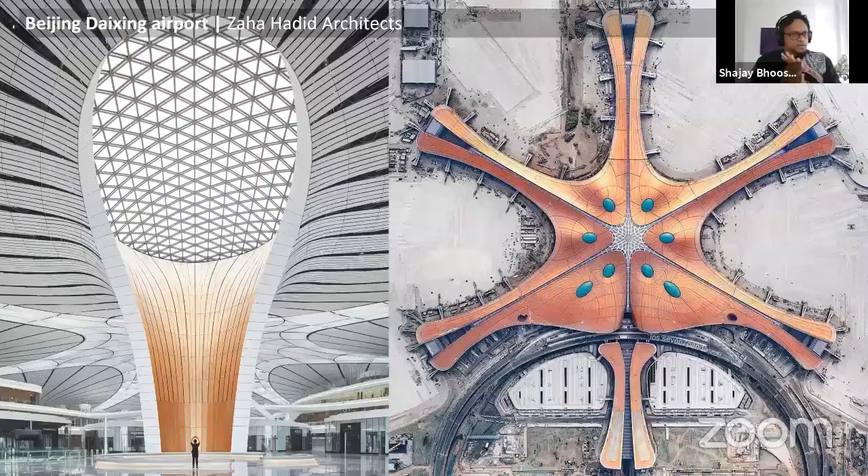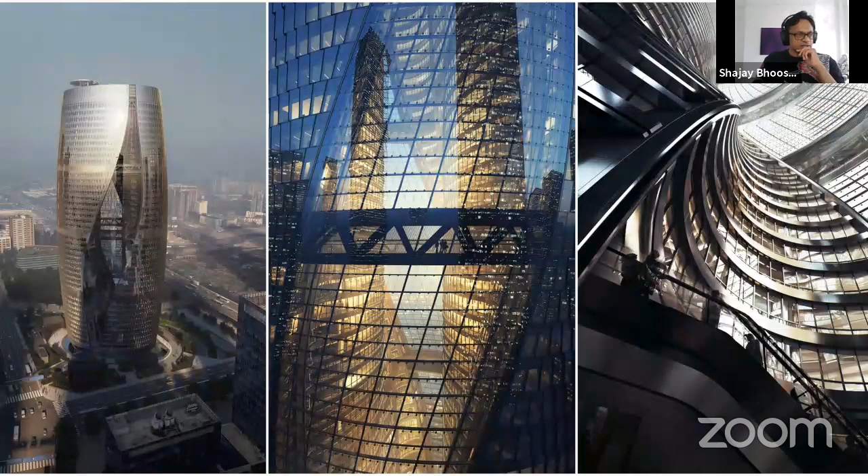My team and I feel quite fortunate to work in a global company with talent from all over the world, from about 60 different countries, spread between Asia and Latin America. We feel fortunate also that our colleagues, peers, and preceding generations are manifesting these amazing buildings, including two that got completed last year, the Beijing airport and the Leeza Soho tower with the largest atrium.

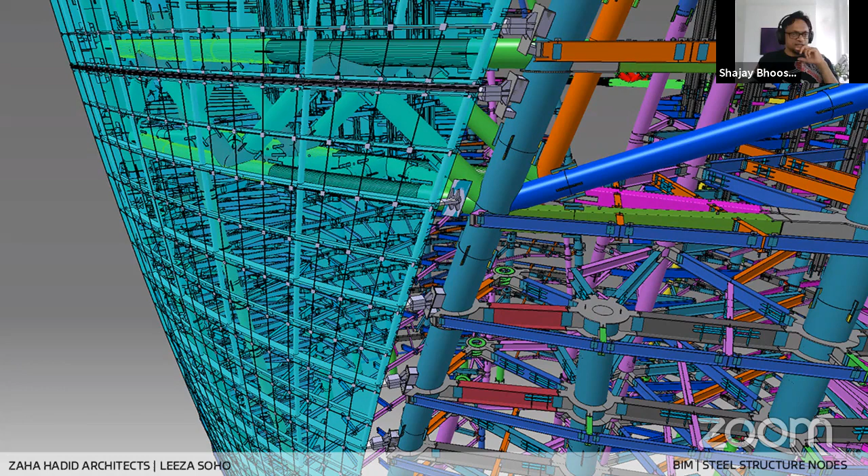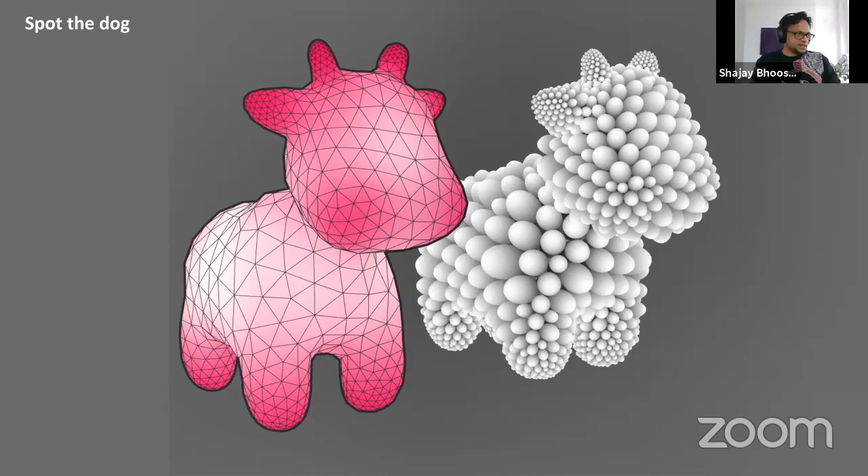We're fortunate to witness not only the physical manifestation of this but also the genesis, and also all the sweat and detailing that goes into these buildings. Lastly, that allows us as a team to focus a little bit further ahead, on the near imminent future, and how we can shape that with new technologies. So we get to play in a serious way because our peers and colleagues are really at the bleeding edge of architecture, a very enthusiastic and motivated group of people.

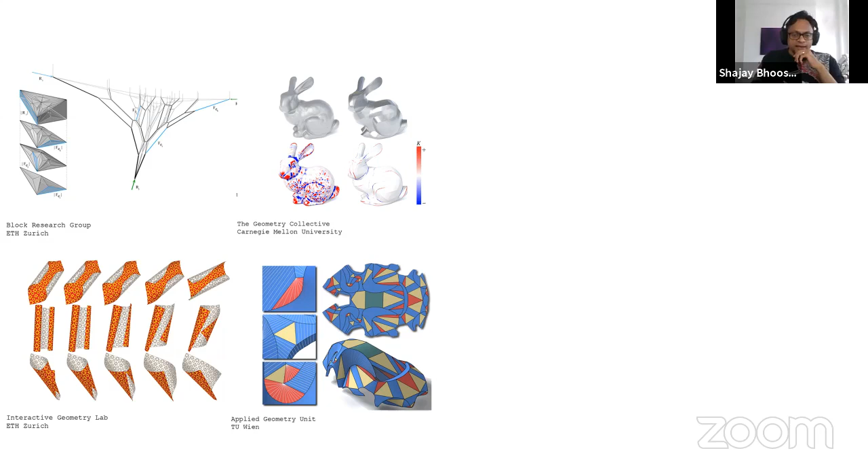As a team we tend to research these geometric, so-called computer-aided geometric design technologies, CAGD technologies, and their relationship to more mainstream BIM practices. We've been doing this for the last 15 years or so, and now a lot of this is becoming available in a more mainstream way. We feel very enthused by recent developments, both by the Block Research Group on one hand, to bring bleeding edge research to a much wider audience, and also practice-based BIM experience from Buro Happold Engineering, making it available through these computational frameworks. So, a very exciting time to be in practice in London.

So that's why I felt we are in a position to talk about the real promise of digital design and robotic construction as it is maturing very rapidly, which is citizen-centric cities or citizen-centric built environment, in some ways for human betterment and through effective resource utilization.

Which I believe is the real promise of digital design and robotic and advanced manufacturing. So the talk will briefly situate architectural design and urbanism of such cities, the social and physical technological layers that might need to interact, and also a first real world attempt that we recently tried to launch, and hopefully will bring to fruition over the next year.

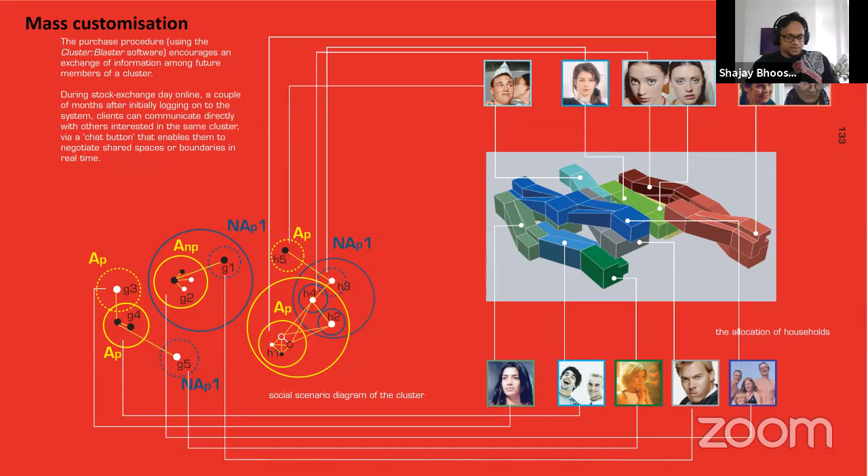This was pre-Facebook ideation and speculation, that you can use web technologies to create online communities and subsequently use digital construction to produce mass customized housing. So since 2015, my partner and myself have tried to pick up this thread in view of the rapidly maturing digital design and also social technologies and constructional technologies of robotic manufacturing and DFMA, design for manufacturing and assembly, and so on.

So over the last 5 years, we have tried to anticipate - through graduate researchers and our own effort and collaborative efforts - we have tried to research this idea across many core topics. For example, the first main topic has been about how to spatially organize communities.

Can the communal synergies be physically manifested, particularly in kind of live-work communities, which were quite common in London before the war - like the ideas of a top shop, or live-work ironmongery, or a bakery and so on. So can we have something like that was one of the topics of exploration.

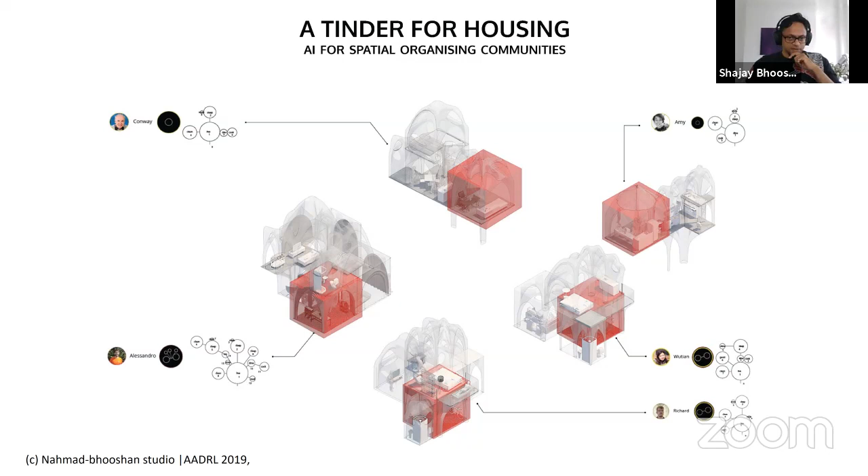And that was for long-term communities, and then we also explored similar things but for short-term communities, like a lot of students and young professionals that come in and leave London at an average tenure of 2 to 3 years maximum. So how can we address that?

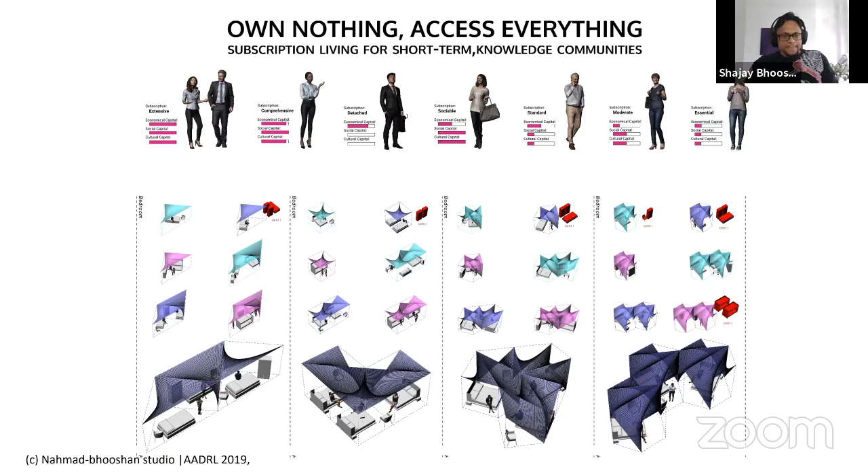Another topic that began to emerge is the idea of gamification of these - how we can leverage game technologies, but also game theoretic mechanisms, to arrive at negotiated solutions between sharing and resource pooling and so on.

And across all of these efforts, the main idea is to challenge the 100-year stranglehold of this architectural diagram of the Maison Domino, and its pairing with a technological equivalent of the Hennebique patents and reinforced concrete construction, and so on.

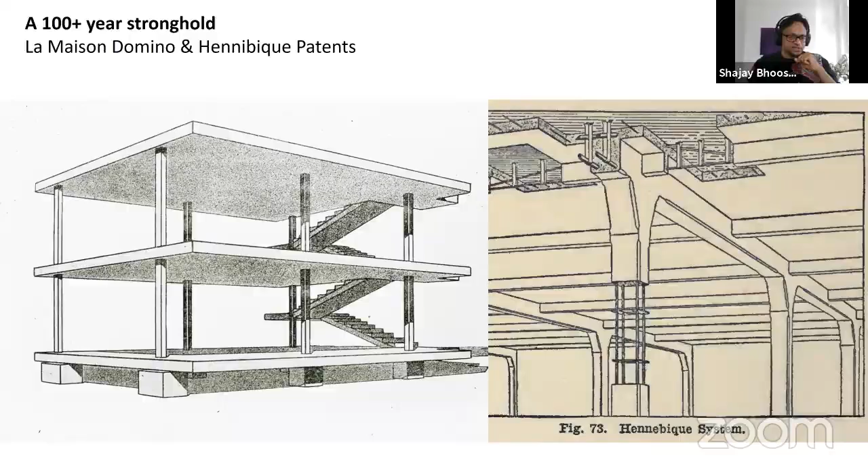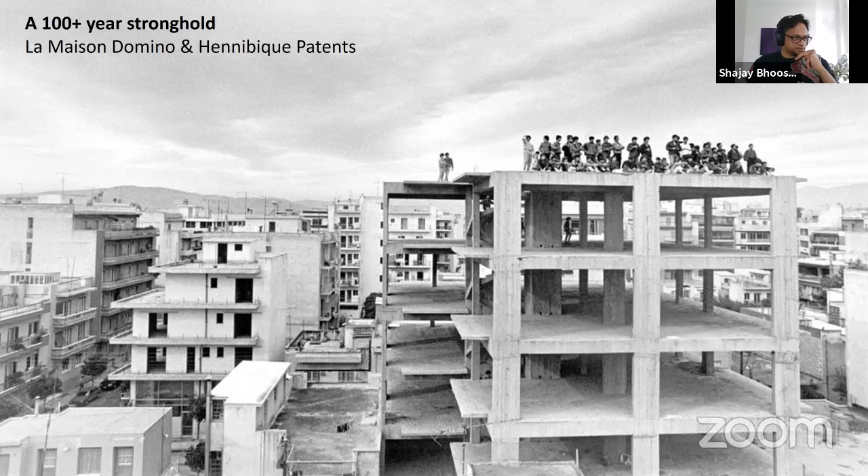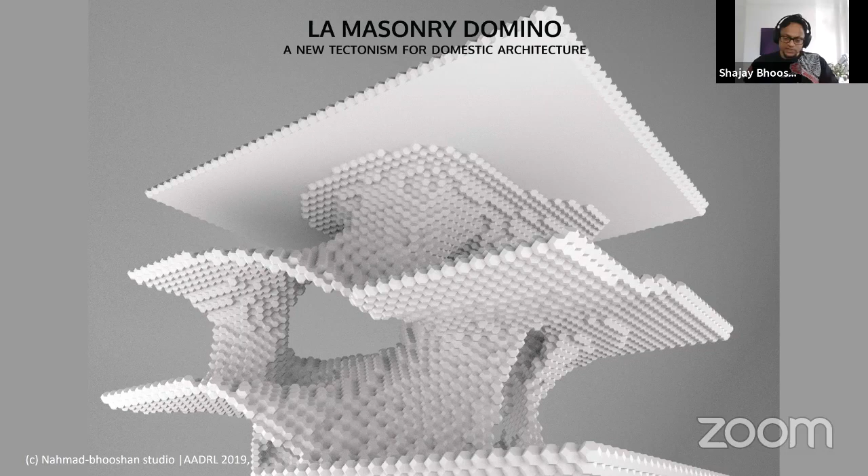So how we can revisit this in the 21st century, because it was enormously successful, but also it left quite something to be desired in the effect it had. So, to take on the positives whilst avoiding the negatives, let's say - we try to revisit across all of these efforts the idea of a Maison Domino, and how we can construct a new tectonism for residential or domestic architecture in view of emerging technologies.

Since last year, with the relative success we've had over the last 5 years, which I'll speak about more towards the end regarding the real-world instantiation of some of these ideas, we now feel it's time to start thinking about participatory cities. And that's what we are doing now.

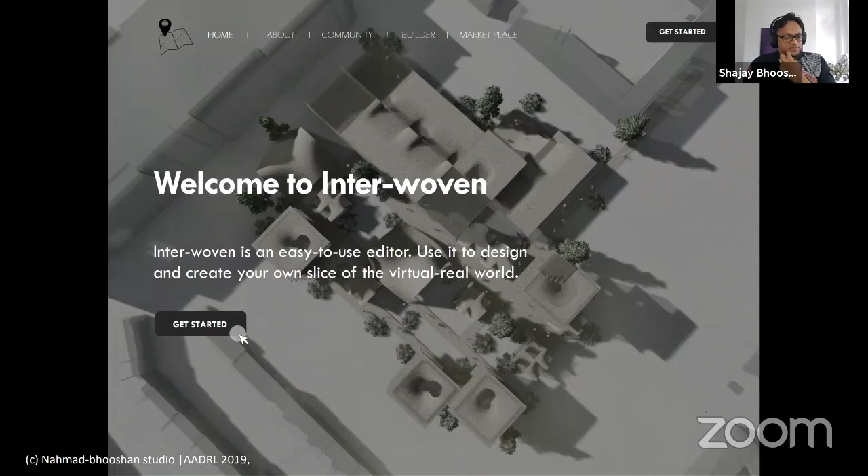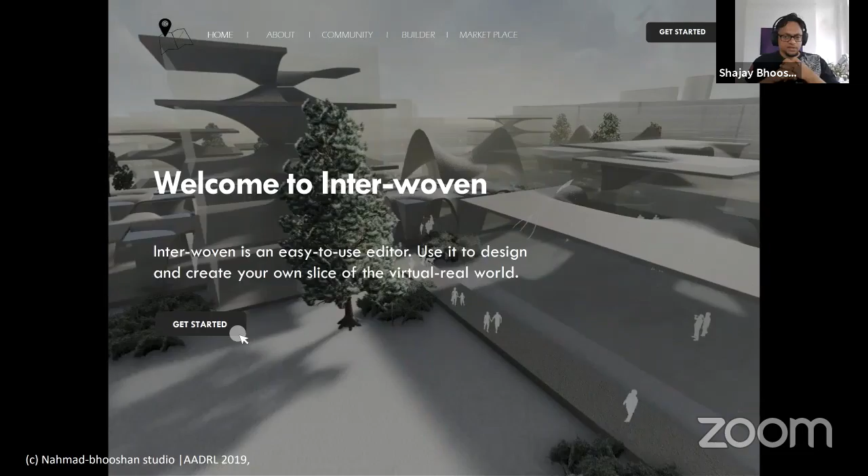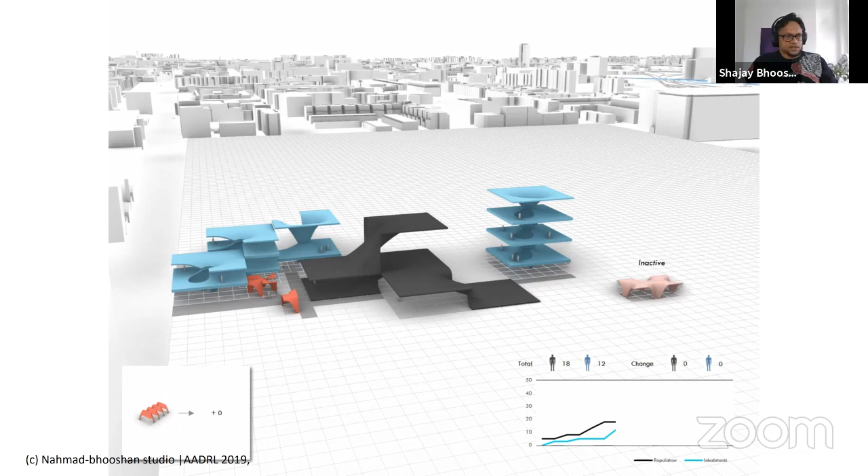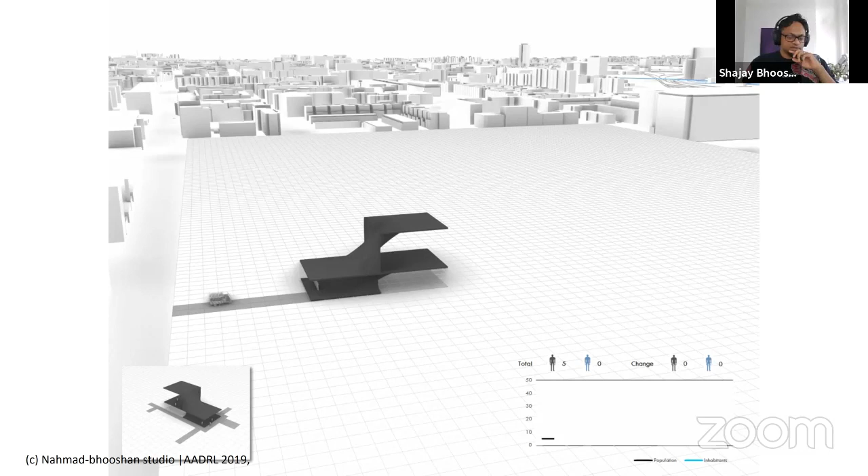Just to give you a glimpse of fresh work from the DRL from this year: the idea is to create platforms, leveraging digital web technologies and real-time interaction technologies, pairing virtual and real worlds through an architectural technology layer. The idea is to have a space of experimentation, speculation, and forecasting—predicting what might happen through gameplay mechanisms or role-playing, so we can keep track of motivations. It's a speculative idea to figure out what might happen if you revisited urban development from first principles.

So in that sense, we see participatory cities as composed of two main layers: the base physical substrate of industrialized construction, and the social-technological layer of governance technologies. So what do we mean by governance technologies?

When it comes to governance of the built environment, we all know it usually relates to taxes and policies of real estate, zoning laws, infrastructure development plans, transport requirements, parking laws, and all these various laws—and governance of those usually multiplies and proliferates quite rapidly.

The question is: can we introduce a technological layer for governance from first principles? Which means—what are the first principles of governance behind all these policies? We have to effectively allocate resources, and we have to take speedy decisions such that we deliver services to inhabitants.

So what are the challenges of such technologies? First, it has to be a low-risk environment, because we cannot make expensive mistakes in the built environment. There also needs to be fluid interchange between expert oversight—planners, architects, constructors—and at the same time, there are many stakeholders, like citizens, who are affected by these decisions. So how can these two interact? How can we provide agency to the non-experts who are affected by expert decisions? Those are some of the challenges.

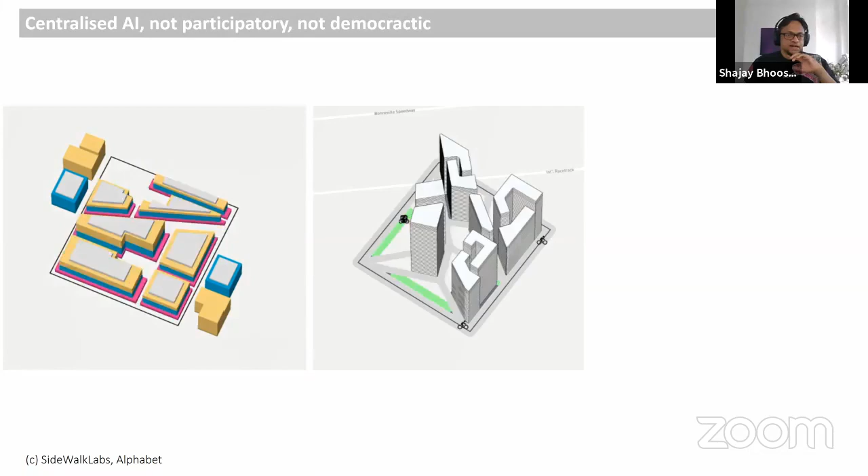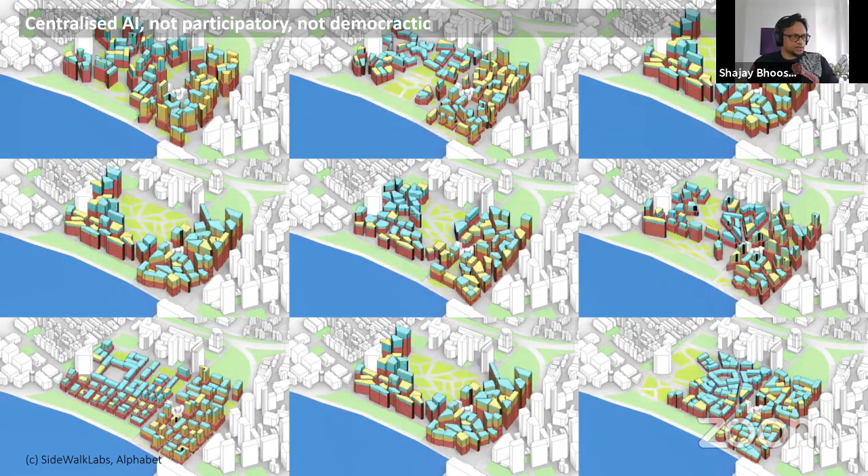So even though Sidewalk Labs and Google are talking about the right things—trade-offs and participation—their design systems are entirely centralized. They're not participatory, they're not democratic. It's a centralized expert system that goes through millions of options and then executes in one go. So it's not as transparent as it could be.

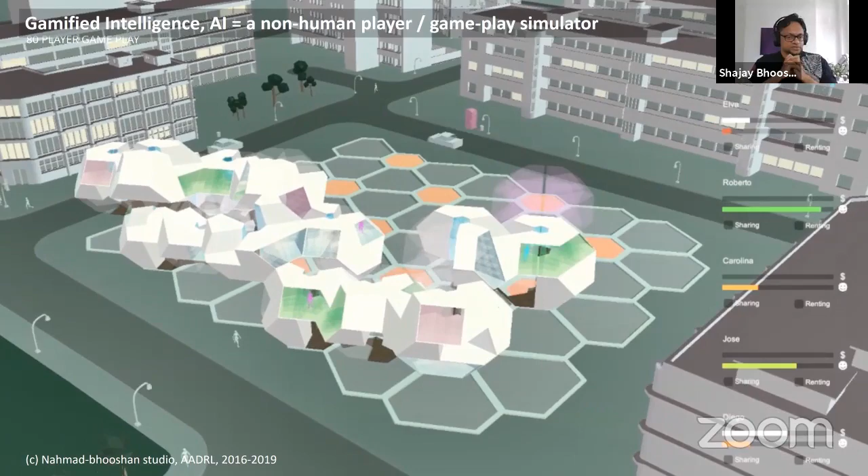Contrast that with where we're coming from: we definitely can leverage and use AI systems, but they are just a non-human player within a game, or they can be used to simulate human gameplay and forecast scenarios of the social and interaction layers.

Here we're simulating 80 players trying to rent and share spaces as they go, sharing resources and transacting with each other in a kind of small economy. We keep track in this simulated gameplay of how many transactions happen between inhabitants—the black represents transactions with the community as a whole. You can see that changes over various time instances: sometimes the community has to invest more, sometimes less. It's a kind of equivalent of a voluntary tax.

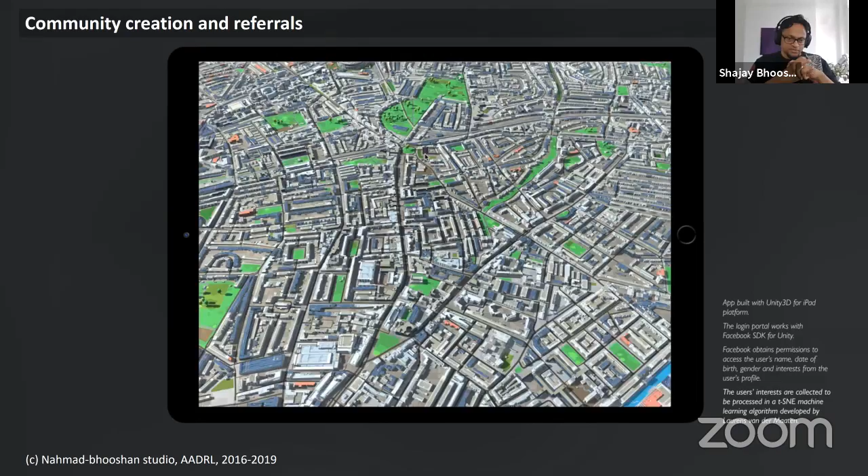That's one side where we think game technologies are very useful to explore. The other is the social layer already built into a lot of these game technologies—you can hook it up to a Facebook community and use Facebook for real, doing good stuff rather than just whiling away your time. Facebook also has a lot of these AR technologies built in.

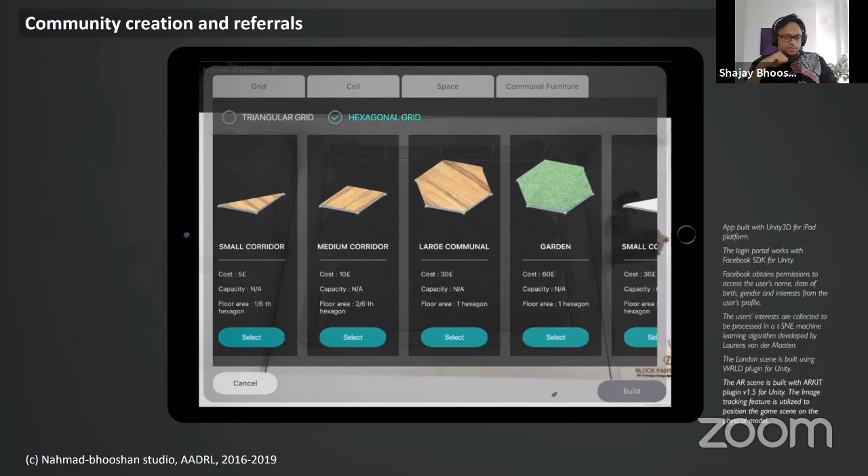And so we could leverage this. This is a kind of simple AR app that we built, where people can choose various things that they want: playground, little bedrooms, and so on. So it's a kind of simultaneous gameplay between multiple people.

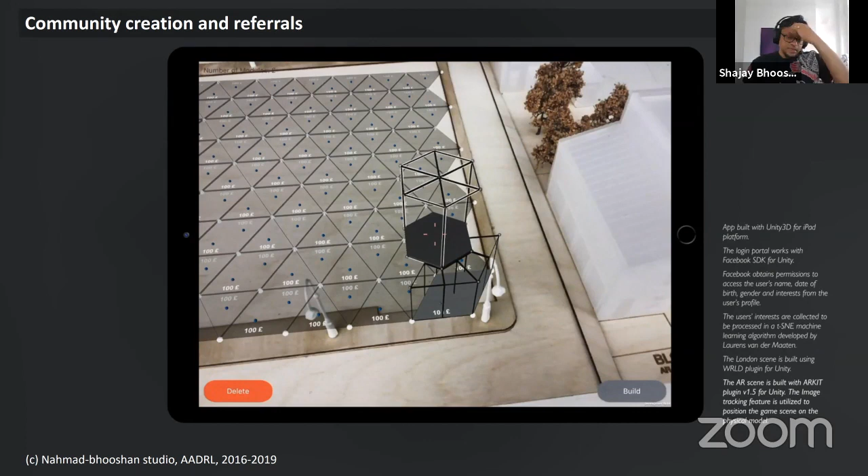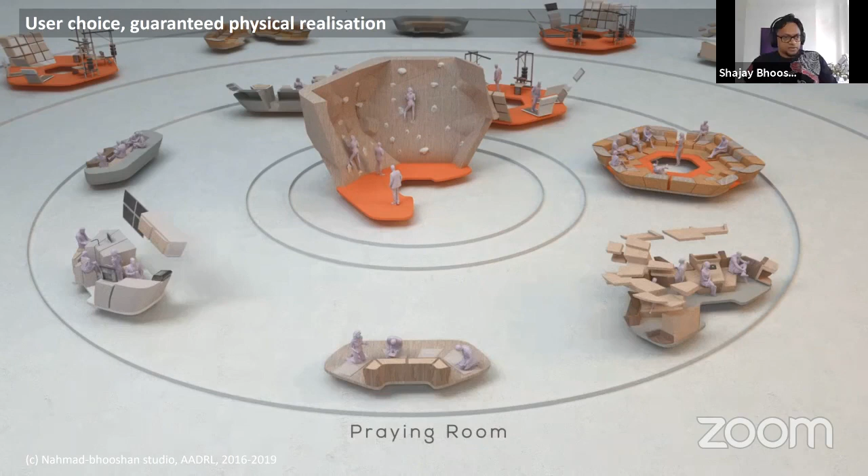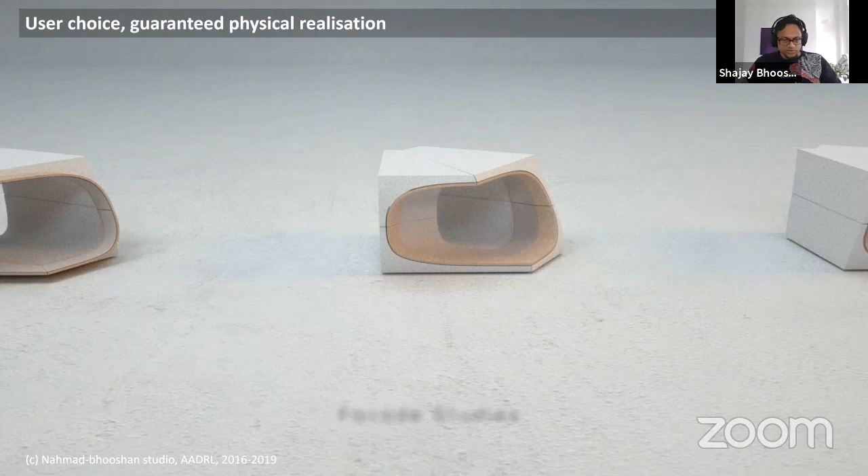And we can also go entirely blue sky with this, where we can at least speculate how to design for all of this choice, so that it's not just like a car where the choice is related only to the color or type of your seat, but we can have spatial choices ranging from what kind of things people want, from rock climbing to gyms, but at all times all of these things are physically guaranteed to be viable.

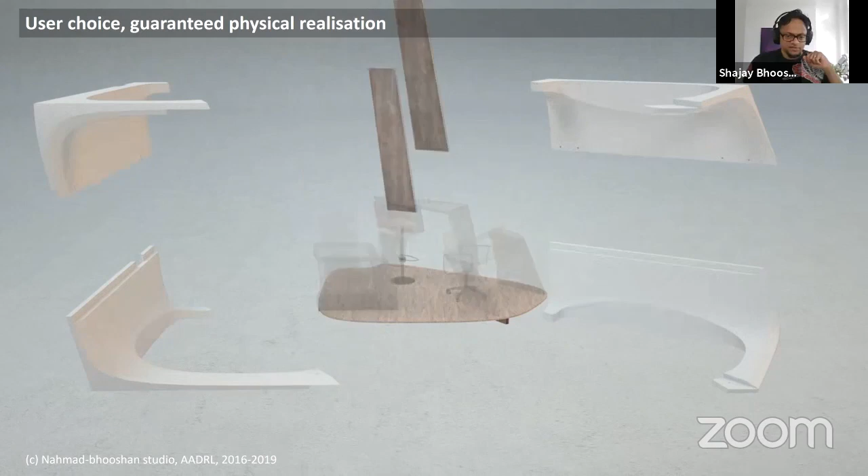So it's a very highly curated design space with enough variety to offer to various inhabitants. That's what we mean by governance technologies: looking at self-formation, self-guided, community-forming, cooperative types of residential developments, and how that can be further extended to cities.

By industrialized construction, what we mean first and foremost is that the kind of technology you use to build cities and buildings definitely has an effect on the type of city you will get. So they compare Atlanta in the U.S. to Barcelona in Spain, and you can also see that it has an effect on the ecological footprint.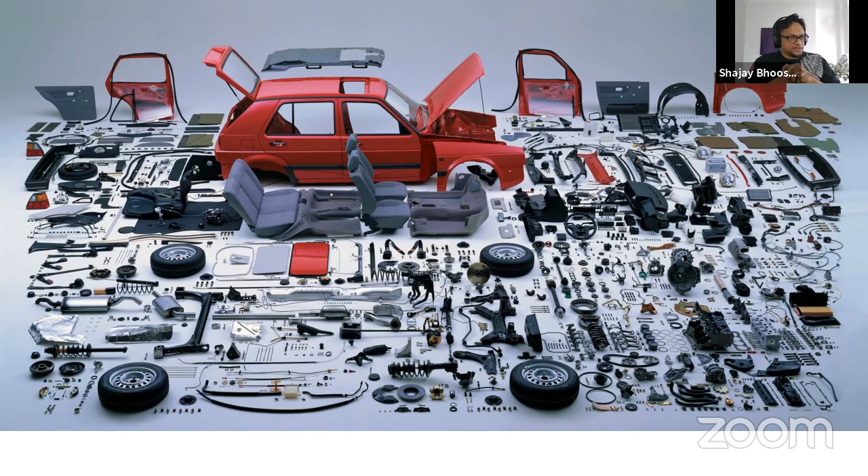Same population, order of magnitude more environmental impact. So whilst there is a ready understanding of the benefits of thinking about buildings and cities like cars, and efficient manufacturing, a kit of parts, and so on...

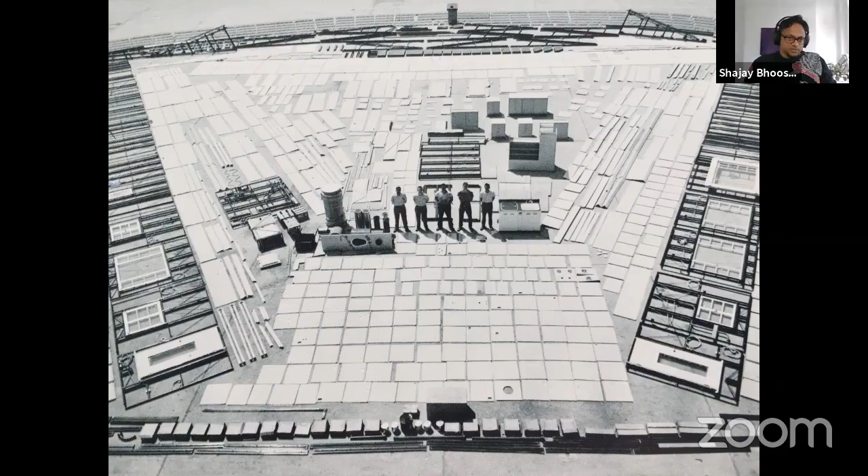When this has been tried in architecture before, this is the Lustron house. It leaves something to be desired in terms of its mass reproducibility. So we don't want all houses to be exactly alike—there is a social layer missing in all of this, which is what we are trying to address.

So whilst we want to take on the idea, the effect, economies of scale of manufacture and assemble type of industrialized construction, we also want to reconnect and upgrade traditional wisdoms. Why? Because there's a lot of intelligence embedded in the way things have evolved in the built environment.

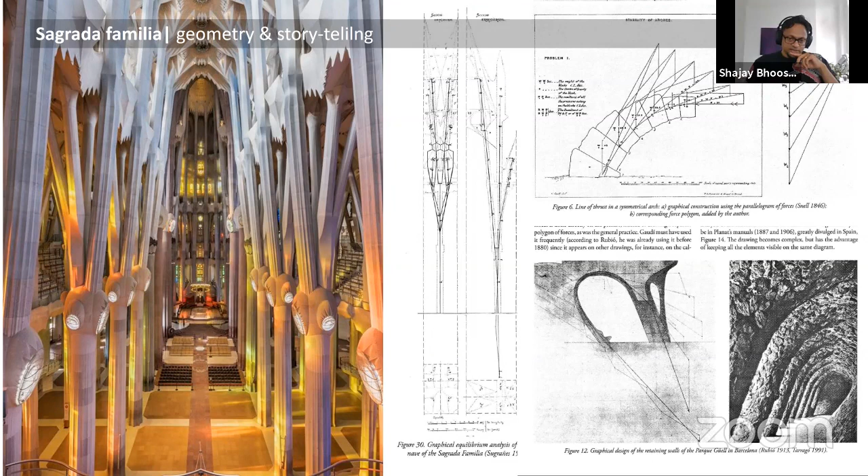So for example, we want to reconnect with some of the technologies and thinking, particularly geometry-based thinking of people from the 18th and 19th century, or even before that from the Gothic and Renaissance times—these kinds of graphical, geometric means of designing structure.

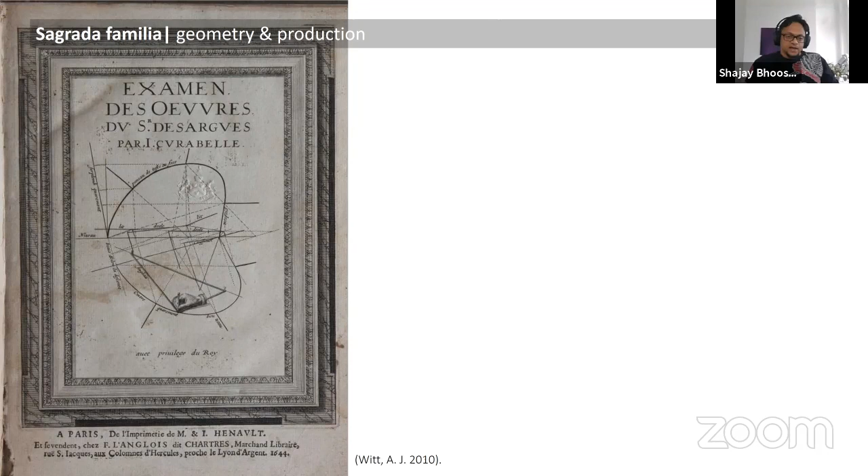And not only that, all these geometry-based manuals of construction meant you didn't need to be a mathematician or a geometer to be able to construct these. So geometry was the base language through which construction was encoded, and geometry was encoded in these machines, in these instruments. It was encoded in the way to draw these construction drawings and even construction instructions.

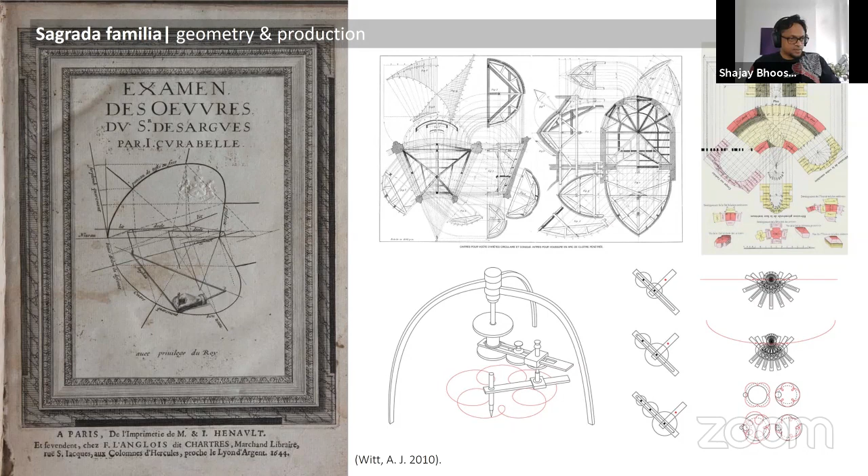And so we want to reconnect with that kind of thinking. This is also, in a way, industrialized construction, where there's an ecosystem of knowledge workers. I mean, this is pre-computer time, but we see these as very, very relevant predecessors to the kind of effort we want to do.

And so this is where we see a significant role for architectural geometry. By architectural geometry, we mean structure and construction aware shapes. I will try and give you a few examples of that.

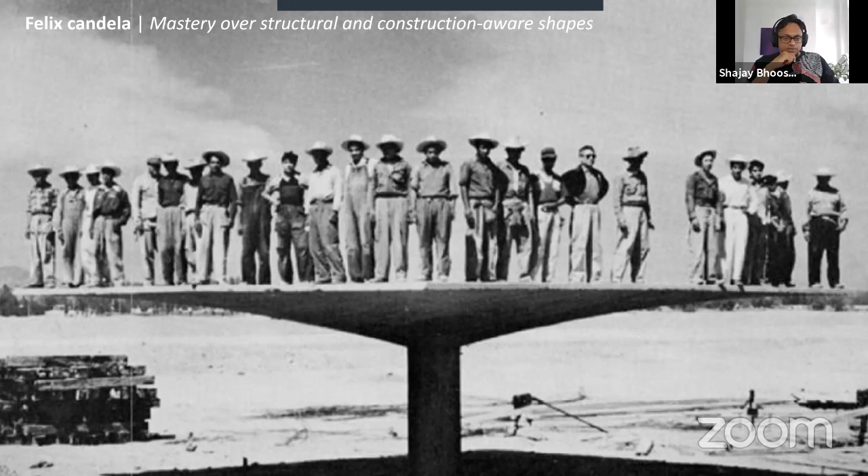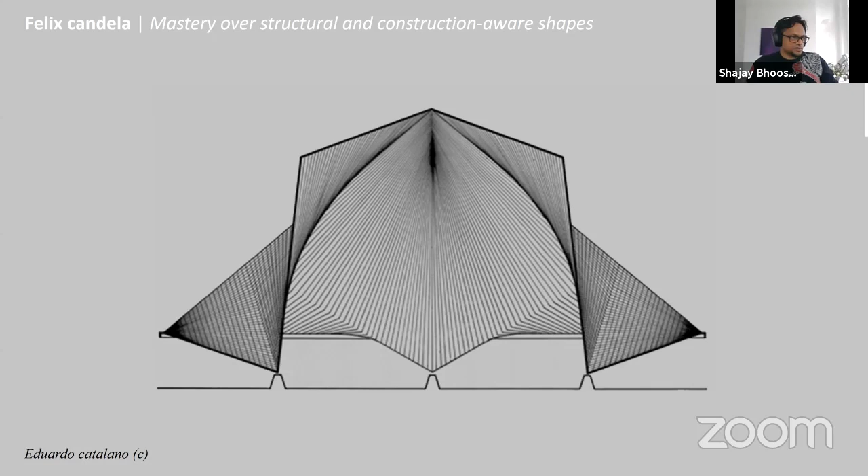And this is in the context of Felix Candela, who was really one of the early masters of such geometry—structure and construction aware shapes. You can see how thin some of these structures are for the weight they can carry, and highly performative shapes. It also had the additional benefit that they could be constructed using simple straight lines, so you could create doubly curved geometries with simple ruled or straight-line formwork.

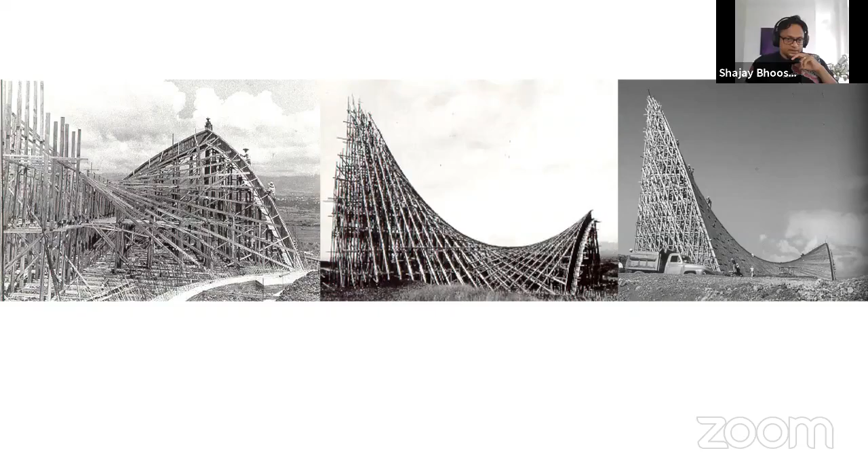This is one of the early examples of what we mean by structure and construction aware shapes. But of course, this came at a price, because you were making the formwork twice—basically making the shape twice, since you had to get rid of the formwork after it was made.

So in that context, we did this one where it is fabric formed with lost fabric formwork. The colorful fabric you see is the formwork for laying the concrete on the outside, and it also penetrates inside. The entire formwork was made on a grandma's sewing machine in Zurich, packed up and taken on a commercial airplane in a suitcase. The entire formwork weighs about 55 kilos. It was designed and engineered by the Block Research Group as part of Mariana's PhD research.

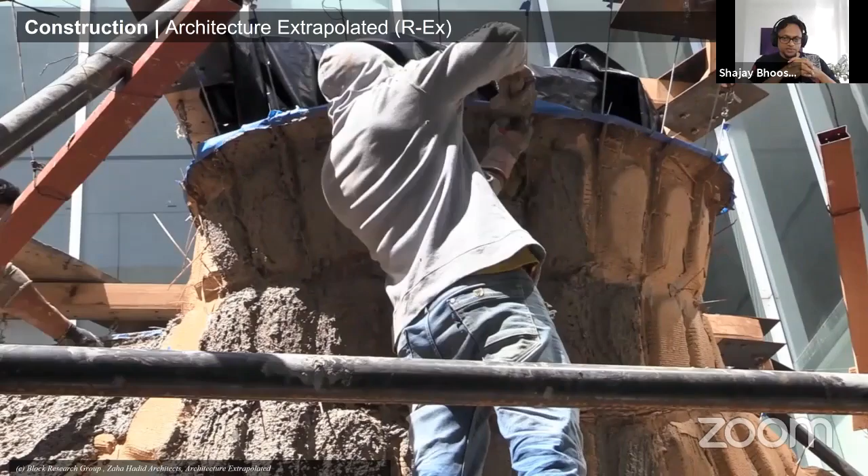And then we just made minimum guide work on the side, and pulled up the fabric and tensioned it. Subsequently, architecture extrapolated and coordinated all the construction workers, and the extremely skilled Mexican labor in terms of casting concrete against gravity, against highly curved shapes.

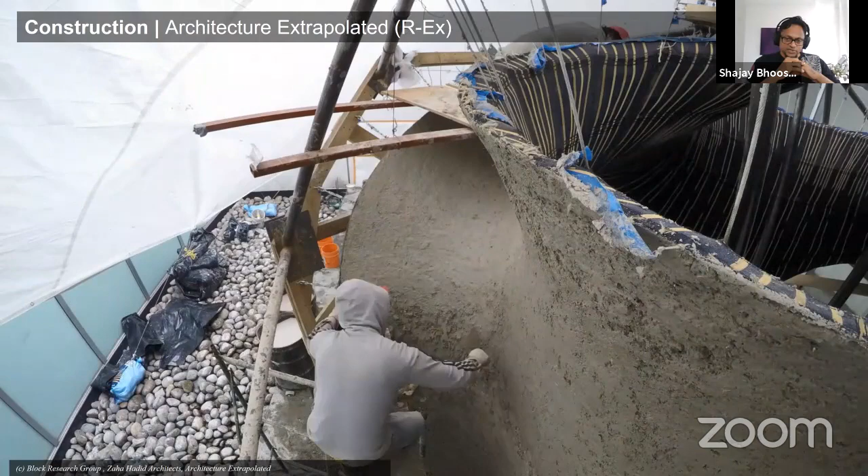Shajay, may I interrupt you just a second? When you talk, the video sound is too loud, we cannot hear you. Okay, yeah. You mean like the sound of the music? Mm-hmm. Okay, I don't have any more music in it. Yeah, so it's a similar situation.

We've tried to expand on these ideas, that everything you see here relates to how it performs structurally and how to construct it. For example, all these lines on the fabric are related to lines of equal tension, so there is no wrinkling. These are not arbitrarily drawn lines; they're drawn specifically to minimize wrinkling when you stretch the fabric. These kinds of shapes allowed us to create many little shapes within a small gallery of 1,000 square meters. There were 25 different stories told in that small gallery because of the added freedom that curvature and complex shapes allowed us to utilize.

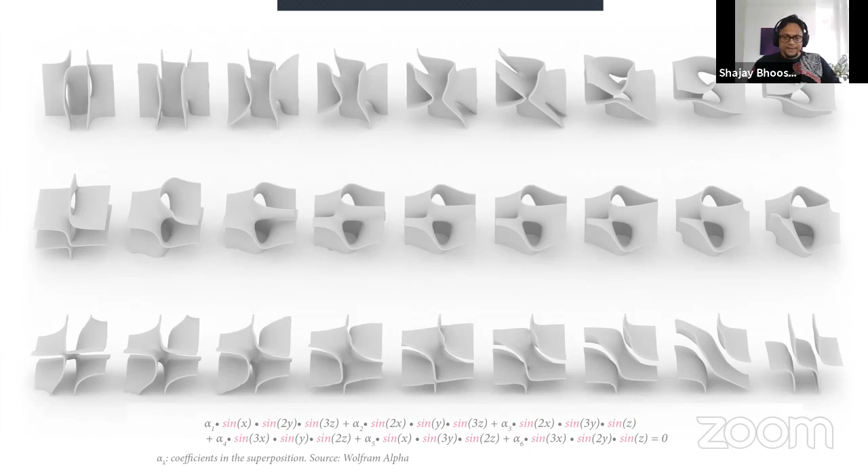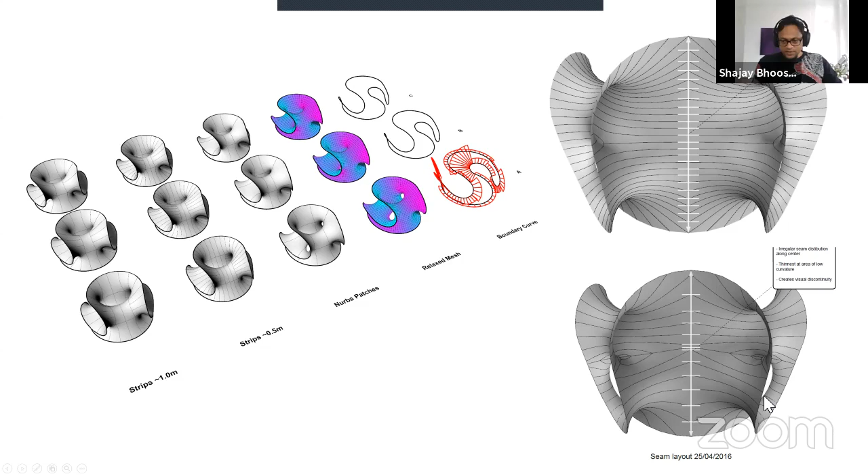So this is part of the constructional aspects: the tailor, for example, wanted to stitch it this way at the bottom right, and we wanted it stitched at the top right. In the end, what was constructed was some hybrid between what we wanted as a design team and what the tailoring team could achieve.

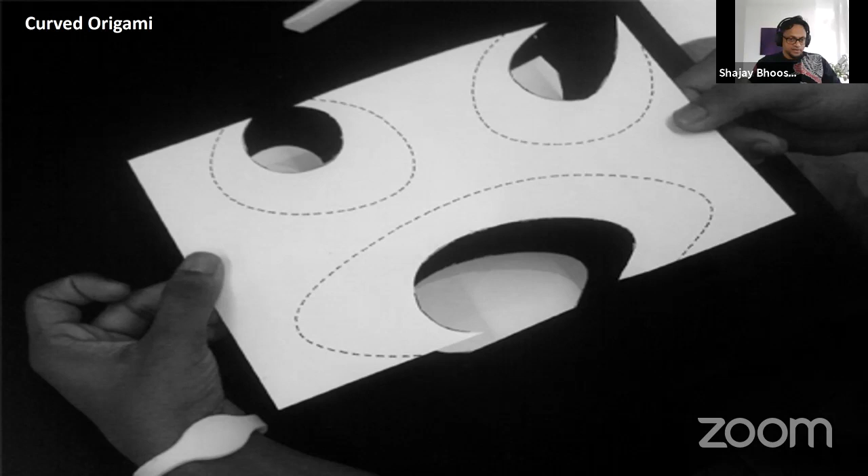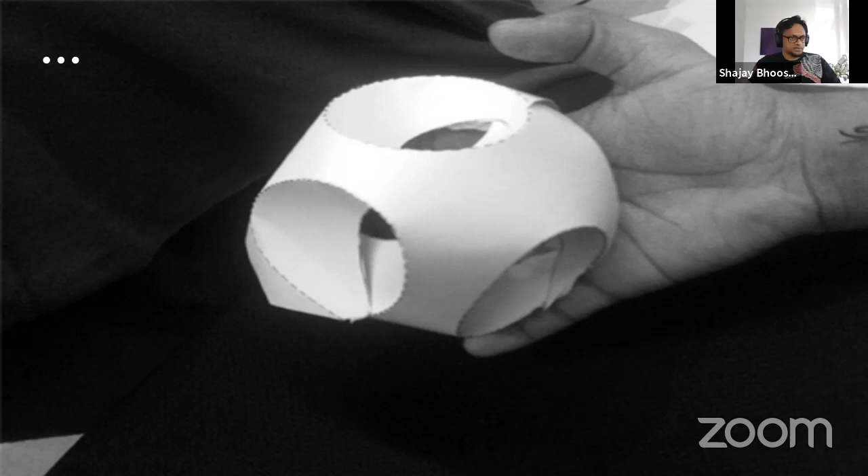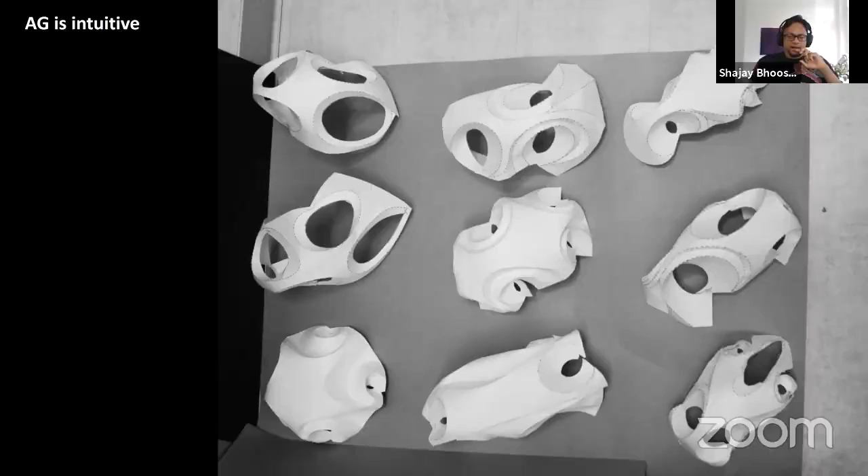Here's another example of what we mean by architectural geometry, or construction and structure aware shapes. This is related to curved origami. Curved origami is very simple: physically, you cut away paper and score it, then fold, and you get curvature for free. This curvature is obviously structurally beneficial, and it's also beneficial in the range of parametric variations you can create in very intuitive ways, and also create very complex performative geometries in very simple ways.

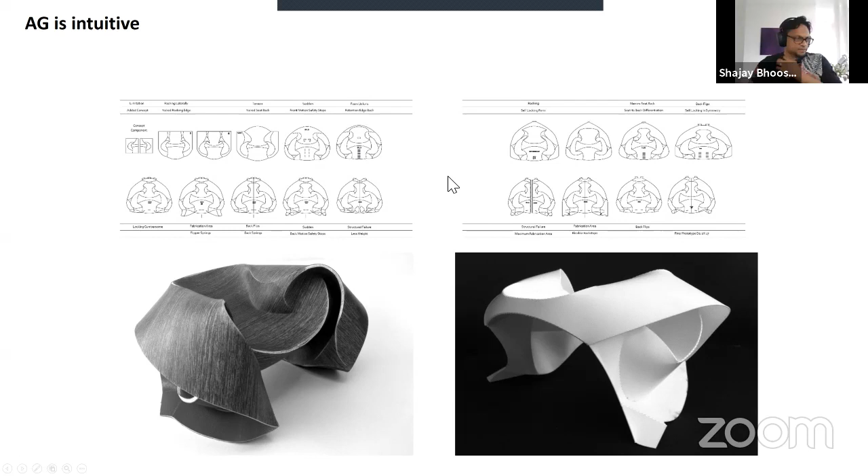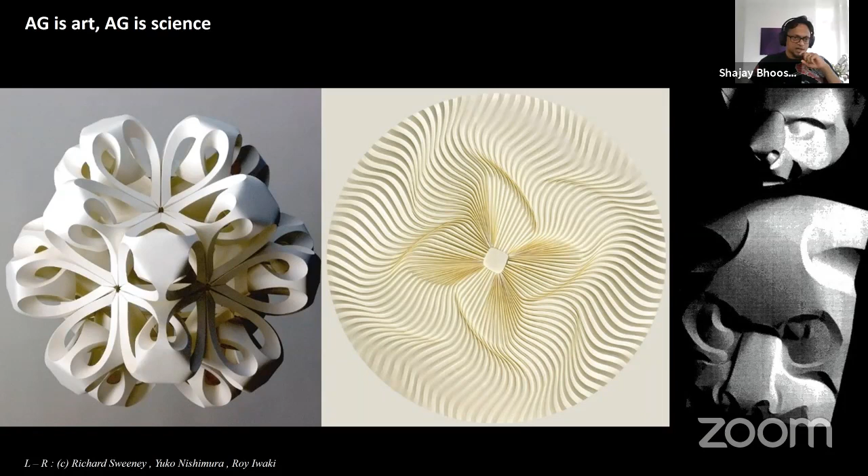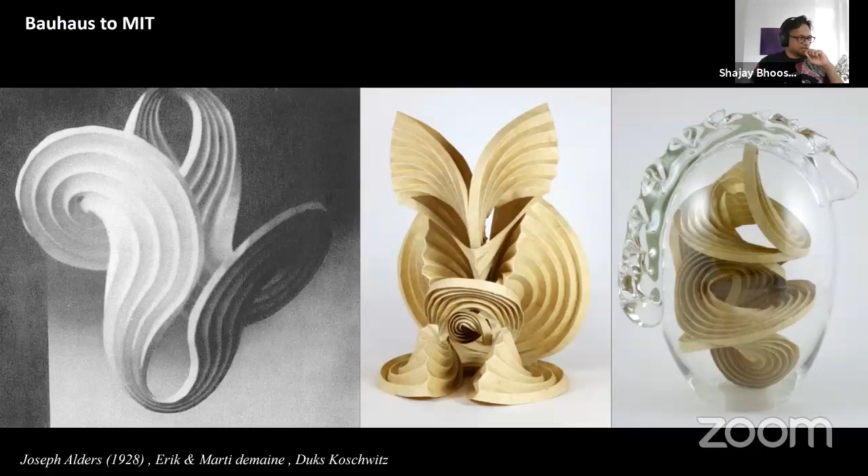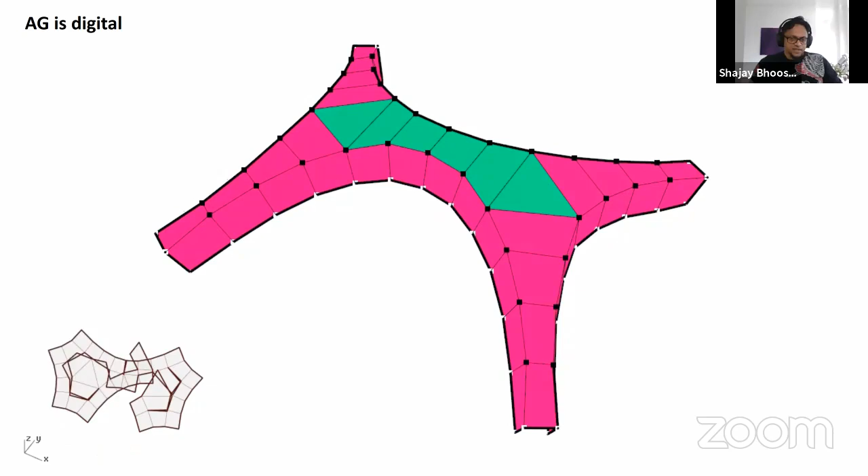Both these shapes come from a single piece of paper, or a single piece of plastic, with these scores, and you can fold, and literally scale these things up from small to large. It has a long history, all the way to Japanese manuals in the 10th century, through to contemporary art and science. For example, David Huffman and Ron Resch in the 1970s picked this up and tried to make it computer-design friendly, looking at the mathematics and computer generation of it. Subsequently it's been studied extensively by Tomohiro Tachi in Tokyo and others. Incidentally, this was taught at the Bauhaus in the 1920s as part of the curricula for architects. So we're trying to pick that up and augment it with digital tools to make these kinds of curved geometries.

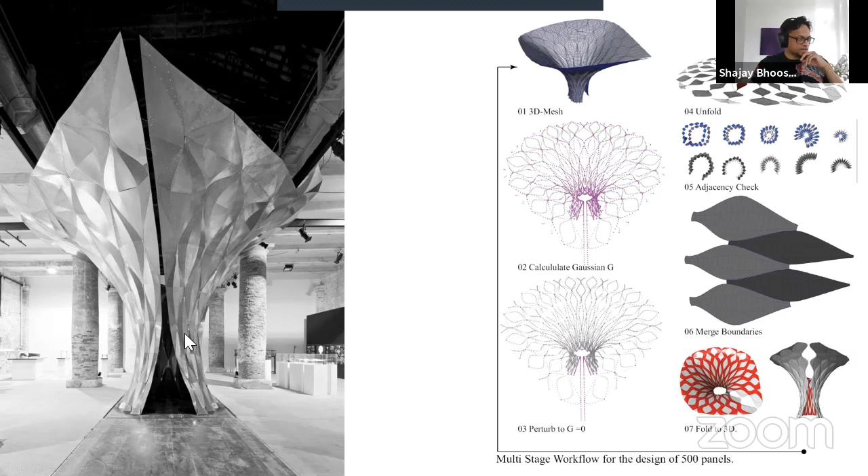This was made in India in 2012 with just a laser cutter. You score and fold by hand, and within a few hours you get complex geometry that is structurally beneficial. It's also materially effective because everything comes from flat sheet material. We used similar ideas for our effort in the Venice Biennale, where all of the intelligence is mainly in this geometric way of arranging material. This piece is 6 meters tall and 1.5 millimeters thick aluminum, and it is self-supporting mostly because of the curvature and the folded plate action.

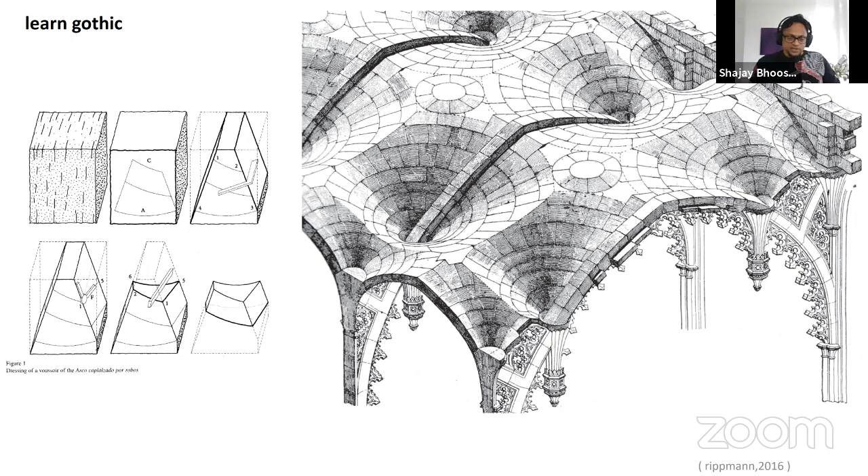And another example, the last one, is these benches that we made in the Science Museum, which again looks at historic techniques of describing geometry that can be cut for stone cutting, the discipline of stereotomy, and then trying to revisit that in the context of robotic hot wire cutting.

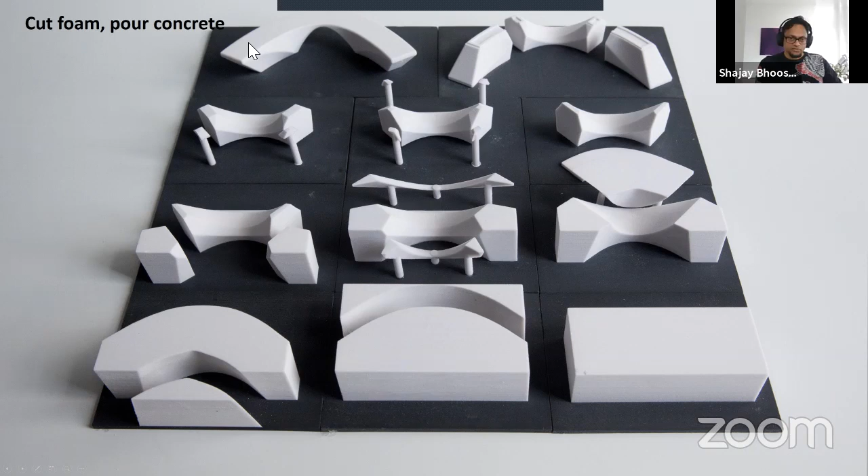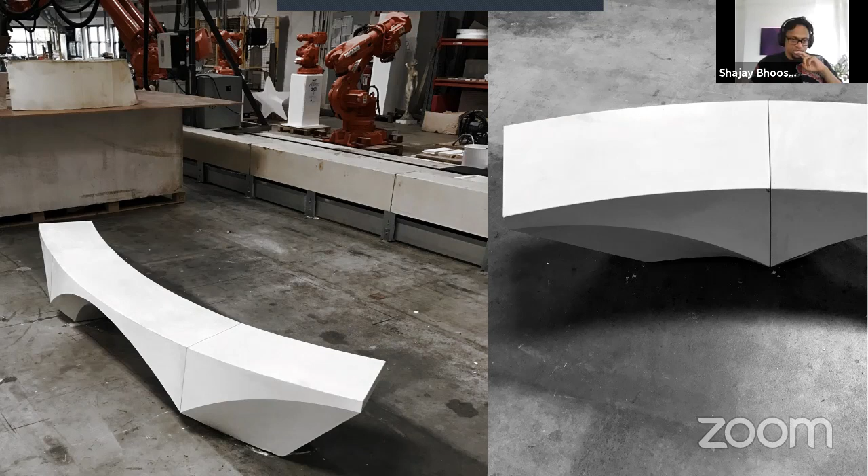So you can go from a full block of foam to the formwork in about three and a half minutes. There were 16 different benches, all delivered on time, on budget. And it also reflects the quality of the finish naturally because of the way the form was cut, so how it was designed reflects these smooth finishes and so on. That's what we mean by architecture geometry.

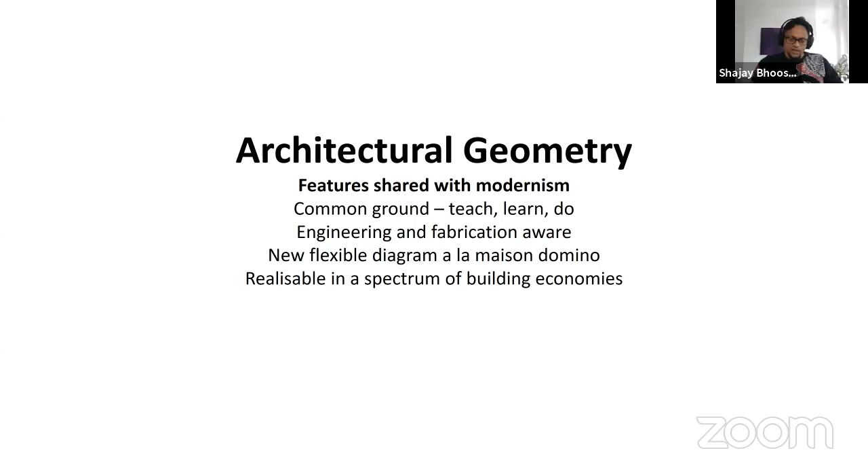What are the features it shares with modernism? Of course, it has common ground in the sense that it follows the trajectory of teaching, learning, and doing. And like modernism, like the Maison Domino, it is somewhat aware of the technologies of engineering and construction. There's also a new flexible diagram to design with these kinds of shapes and new technologies. And it is realizable in a spectrum of building economies, from India and China to Latin America, where we have done it, and also in every place in between.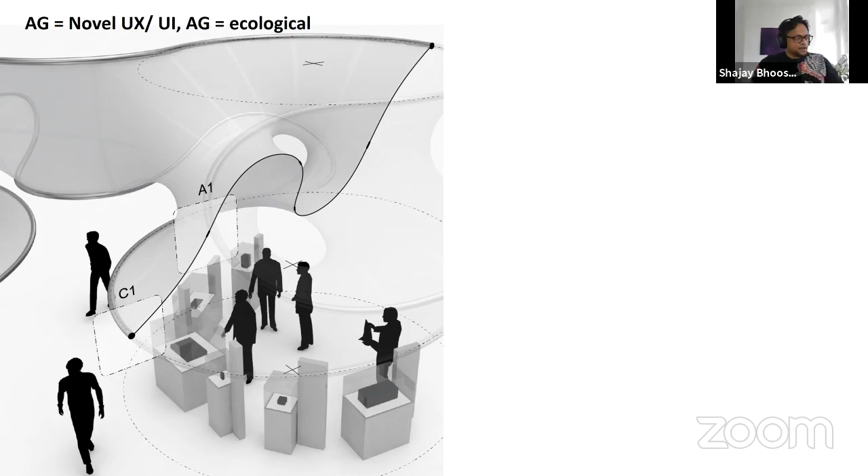What is different is that it has far more degrees of freedom. As we mentioned before, this allows in a very small space to tell very many different spatial stories. For example, here we were housing a very somber artifact related to eugenics alongside more playful ones, all within a small space without having to make special rooms for this. So high curvature offers high degrees of freedom to articulate spatial variance and user experiences.

And curvature is beneficial ecologically in the sense that you can use very weak material, like in this case by Block Research Group, using just raw earth, very weak material in good structural shape. So you can span with very weak material, which means very little embedded energy goes into it, because a large part of the strength of materials comes from pumping energy into the material.

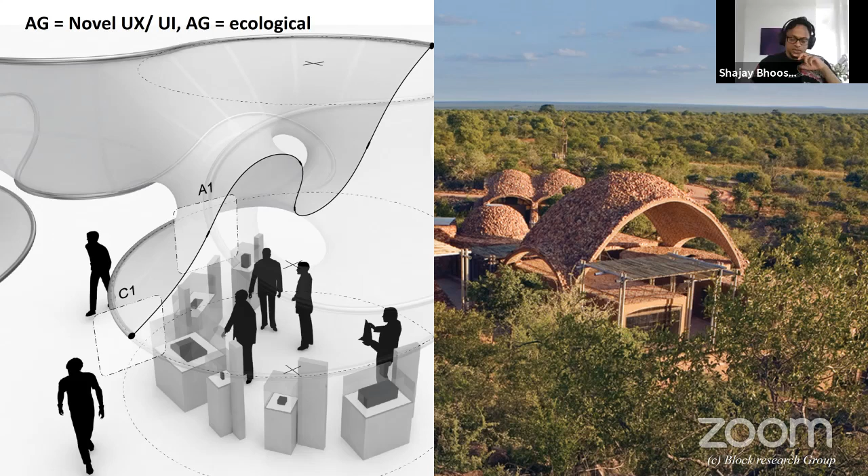This is the principle they are also now using to produce floor slabs, which are 70% lighter, and they save 25% of space, all because of a bit of curvature and also the ribbing on top. So much so that recently the BBC even picked up on these ideas of sustainability, with practicable ideas of sustainability and the use of appropriate structural shapes to save material, to save energy, and also have longevity in construction. That's what we mean by industrialized construction.

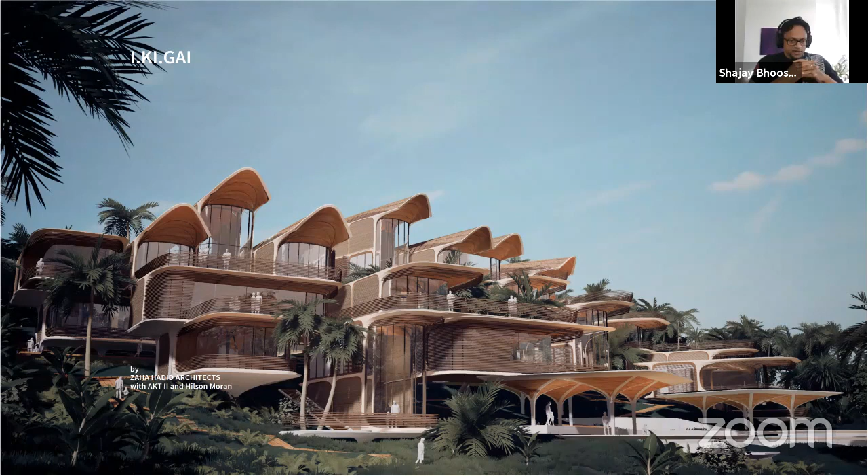Of course, factory made, manufacture and assembly, but also to reconnect with the historic past and particularly the wisdoms of the past. So I will end with this kind of real world example of where we are trying to bring these two things close to each other. It's a small island off the coast of mainland Honduras, and we are trying to make this kind of housing integrated into the landscape. It's an effort between Zaha Hadid Architects, AKT II engineers, and Hilson Moran environmental engineers.

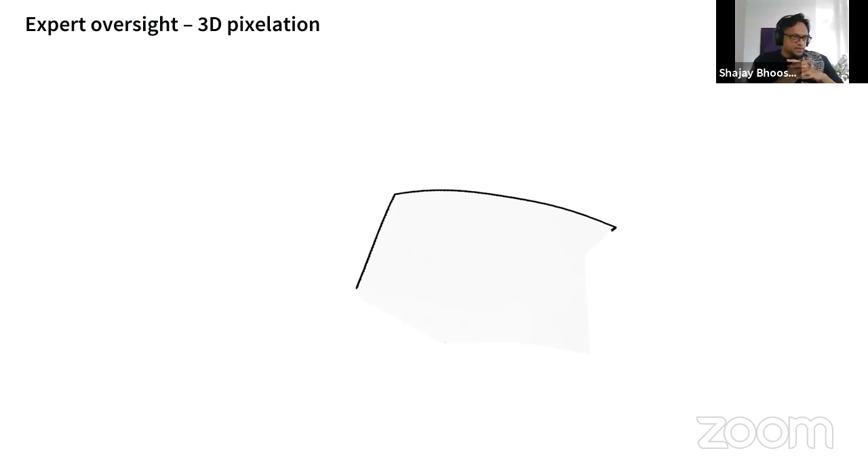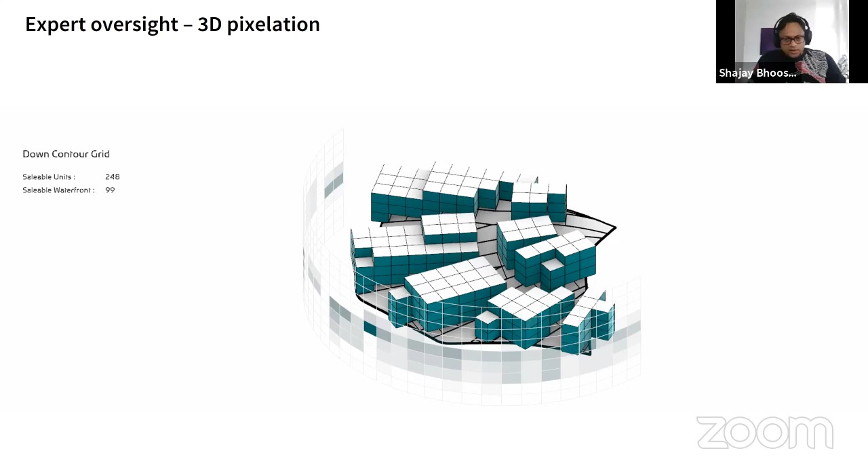Honduras has a lot of locally certified timber. And so what we are trying to build here is to offer choices and allow people to form communities, or at least shape their own, embed their own choices and interactions with people.

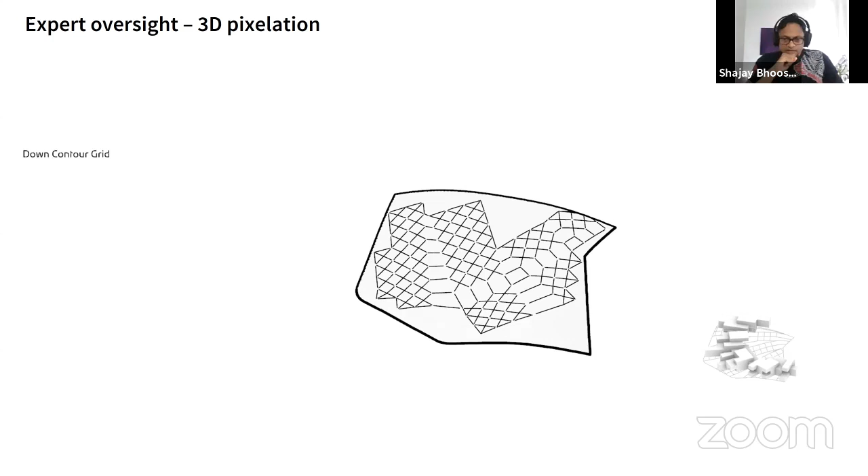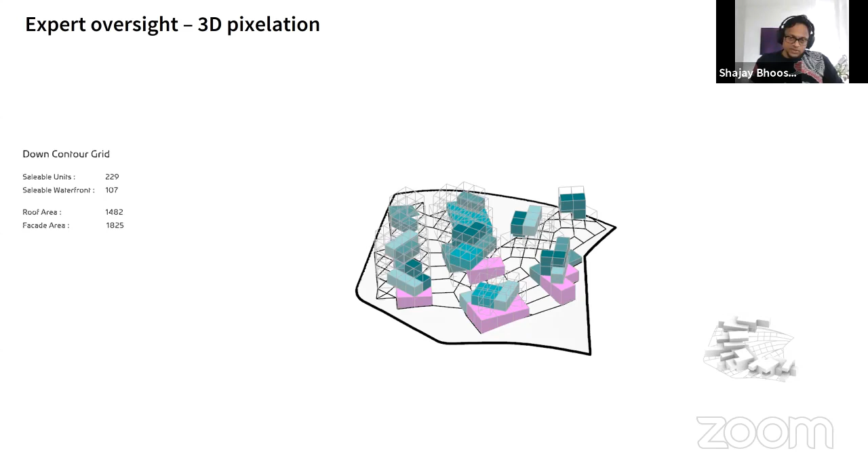So we as architects and engineers first lay out these kind of pixel grids according to some global parameters like views and solar gain and so on. And subsequently, users are able to pick on those 3D pixels, and they can choose whether they want to get expansion rights or occupation rights, and view rights and so on. And then they can negotiate this with their neighbors.

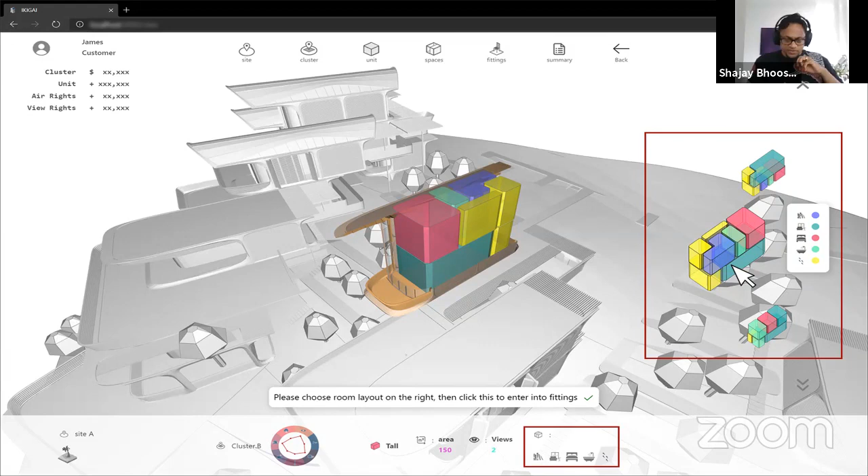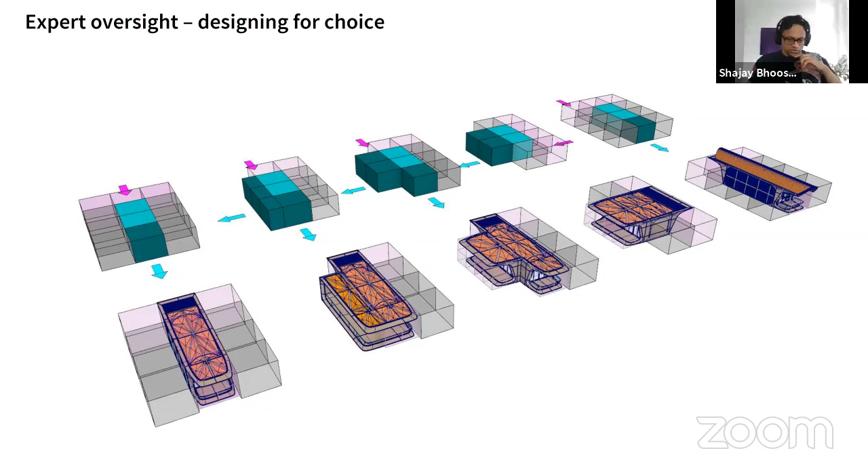And subsequently, they can also choose their own internal layouts, whether they want the living room facing the ocean, or their bedrooms, and so on. To give a sense of the amount of choice designers have to design for, just picking 3 pixels out of a grid of 9, you can already see how these choices multiply. In this first attempt, we are restricting the choice to a highly curated set, but hopefully in the future we can expand to more choice.

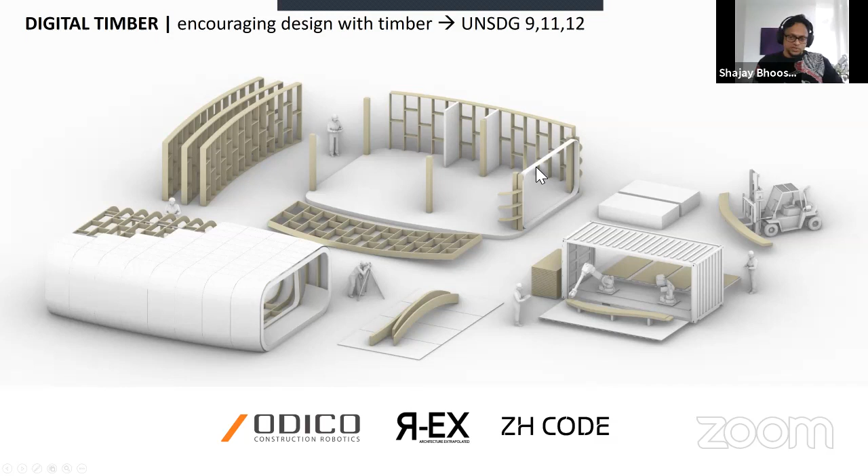The other effort we're trying to do is to import machines, not the entire house. We want to import machines and use local material to bring the benefits of digital fabrication to low-investment, early startup type communities, and work synergetically with the highly skilled human labor available - carpenters, masons, and so on - augmenting that skill with lightweight, low capital investment machinery, like things that can come in a shipping container. This way it can build things much bigger than the machines alone, together with the humans.

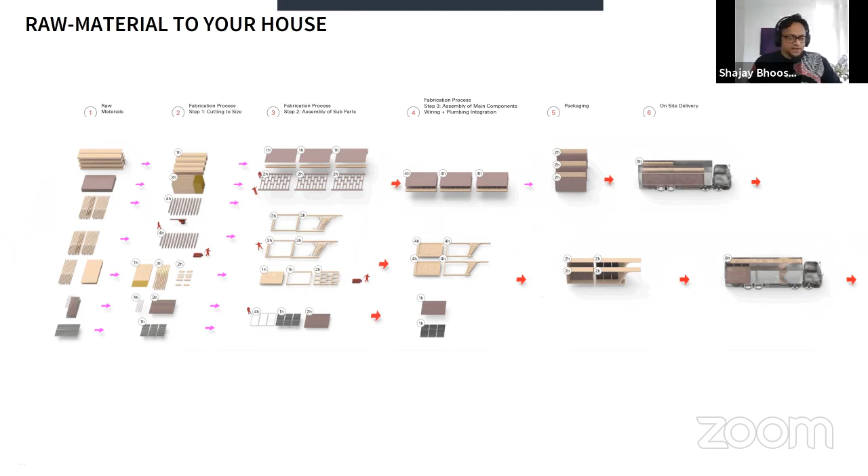And that also allows us to revisit the supply chain, in a way - how can we turn raw material into the house, and where can we innovate along this chain before raw material becomes a house. So that's where we are.

To conclude, what we mean by citizen-centric cities is a kind of digitally enabled marketplace, interaction between people with investors - it could be the state, private investors, some partnership or joint venture - producers like architects, engineers, contractors, and the eventual consumers, which are the end buyers, the occupants, the inhabitants, and so on.

Regardless of who these main stakeholders are, we believe the gamified aspect of resource allocation and decision making is an important criteria, so that we don't have to make very many rules. We just set as few rules as possible and allow for negotiated solutions to take place - to improve the agency of the inhabitants in the decision making, to allow them to participate in the decision making process.

And all of this has to be built upon the guarantees offered by industrialized construction, so that at least some of the variables are taken out. So what you see on the configurator online is relatively close to what you will get in reality. That's where we begin to see a cyber-physical coupling in architecture and urbanism in the near future.

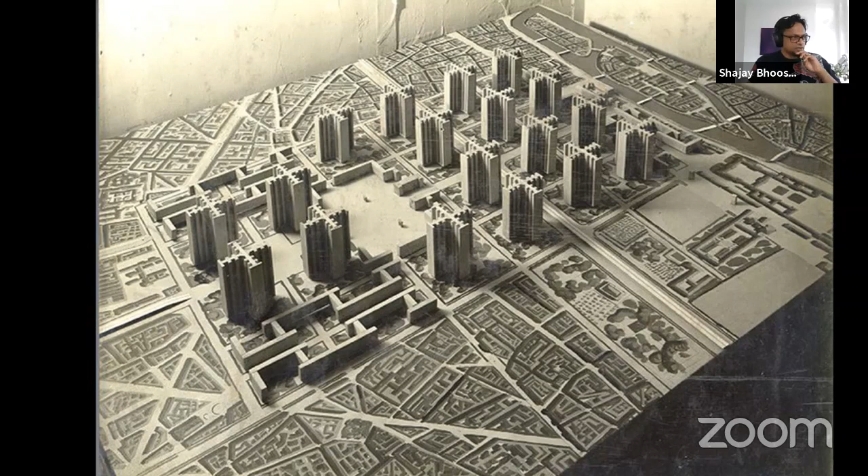Some of this led to highly impressive, aspirational showcase buildings, and also a lot of this made its way into the housing of the time. Perhaps where modernism did not succeed as much is at the city scale - it left something to be desired, and that's where we want to succeed, where modernism didn't.

And we think the path to success is to use participatory platforms to solve the problems of the 21st century - platforms that allow choice and negotiation, and design and construction technologies that connect with the past, are upgraded using digital technologies, and allow architects to tell stories whilst physically performing well.